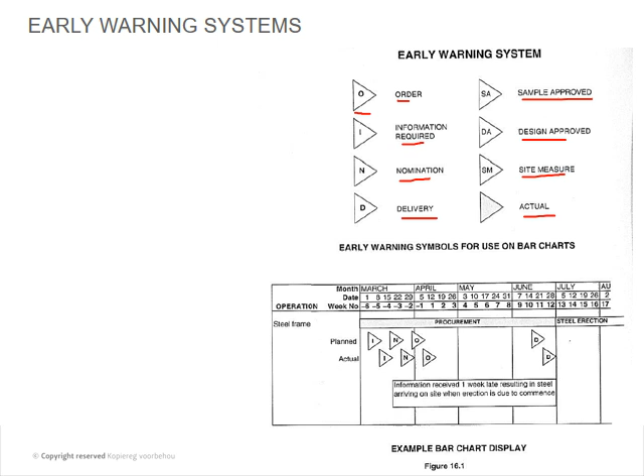So okay, then your progress and delays, progress reporting. Example of events: the contract is frequently delayed. So you can go read through 16.6 for me, which is all about progress and delays, and it's very important that you guys do read through this. And I'll probably in the near future have a bit of an informal assessment on this.

So please make sure that you guys know what a contractor risk event is. For instance, delay by the subcontractor, weather delays, labor, and employer risk events such as variations in designs, changes, late possession, and then other reasons. So you guys must be able to discuss 16.6 for me. Okay, then progress reporting.

The purpose of progress recording is to provide a record of weekly progress in order to assist the construction director, contracts manager, and the site agent, and to inform the monthly site progress meeting with the architect and his administrator, basically to keep track of what's going on. Then you have many procedures to assist you in this. In this chapter you can easily see they've got this little diagram that's included here.

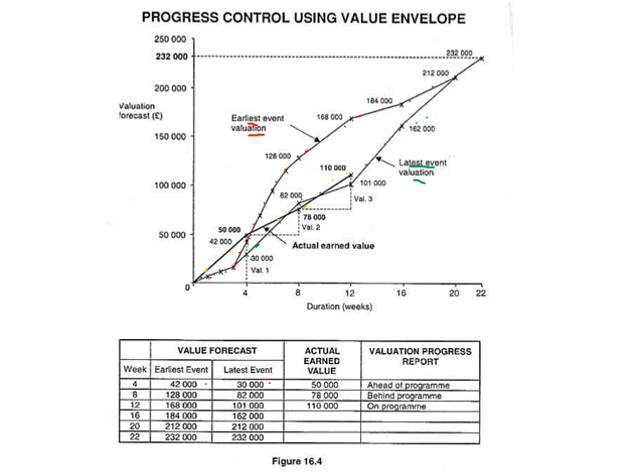Okay, and then obviously you get your actual, and I'm going to mark that in yellow, so this is your actual. Okay, so what they basically did is they had an optimistic view and a pessimistic view, and then you have your actual earned value. So please note that you have ahead of schedule. Just put it back on red. You've got your ahead of schedule, so it's on this side.

Behind on schedule, which is now where's your behind? Here's your behind, your 78. There's your behind. Okay, and then anything in between this area here is on program. Okay, so there's basically a bit of a float that you've got here. So you will see here is 110, and it means that you're on program. So you guys can see this.

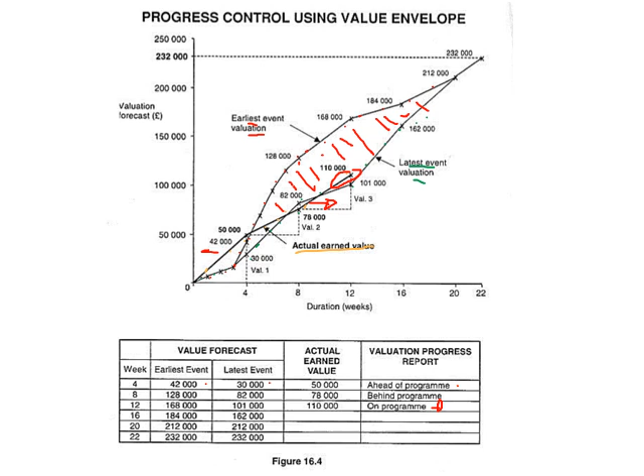This is a bit of a theory question that I might ask. So please go through this section. It's very straightforward. Just to remember that. Okay, then you need to go through delays. I'm not going to go through this.

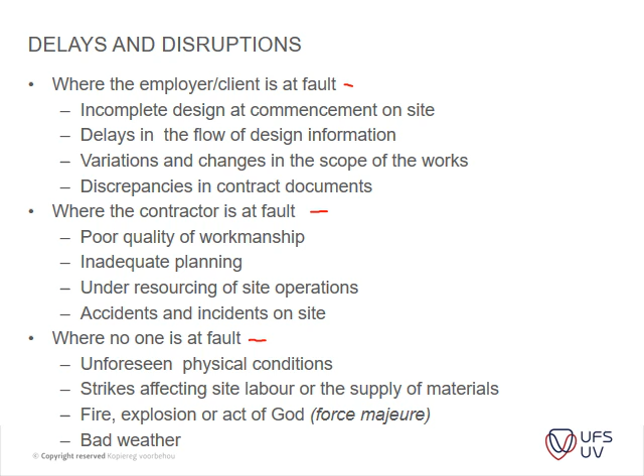This is very much theory that we've actually dealt with before, where the employer is at fault, where the contractor is at fault, where no one is at fault, force majeure as usual. So you guys have done this in CCM, so I'm not going to repeat this. But you will have to know or draw from this information when you do your discussions. So please don't neglect this.

Then we focus on your type of delays. You've got your delay event, which is if you go on page 360, you will see your delay event. It refers to something that happens or a set of circumstances that arise that lead to a delay. The delay event may be the responsibility of the employer or the contractor, or may be beyond the power of either party. Okay, so that's a delay event. It's an event that causes the delay.

Then you've got culpable delay, where the delay is the fault of the contractor. This is also referred to as a non-excusable delay or contractor delay, but we'll have a look at culpable later on. It just means someone is to blame for the delay. Then you've got a non-culpable delay, where the contractor is late through no fault of his own, which is your items, for instance, late issuing of information.

And then you've got your neutral delays, and neutral delays are divided into different sections. This is where the delay is caused by factors beyond the control of either of the contracting parties, but does not mean that neither party bears a risk. Okay. Neutral delays at the contractor's risk is bad weather, okay, late delivery, delay by subcontractors.

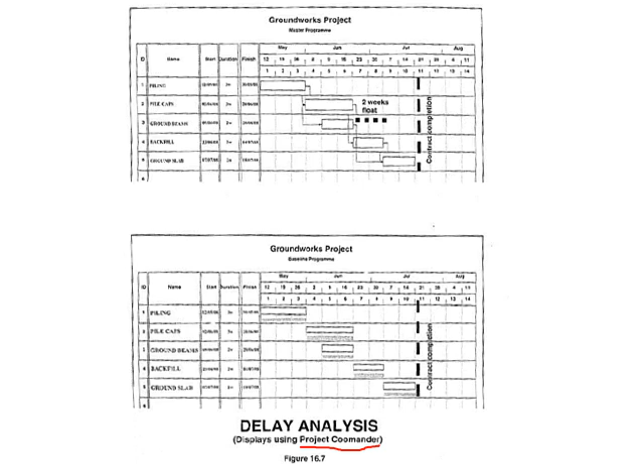So here you can see in 16.7, this is your planned program. So it's displayed using Project Commander. Okay, we usually have CCS or Microsoft Project. Commander I haven't worked on yet, but basically it just gives you a program with all the linkages in, and then it's the same program just given here underneath with your baseline underneath.

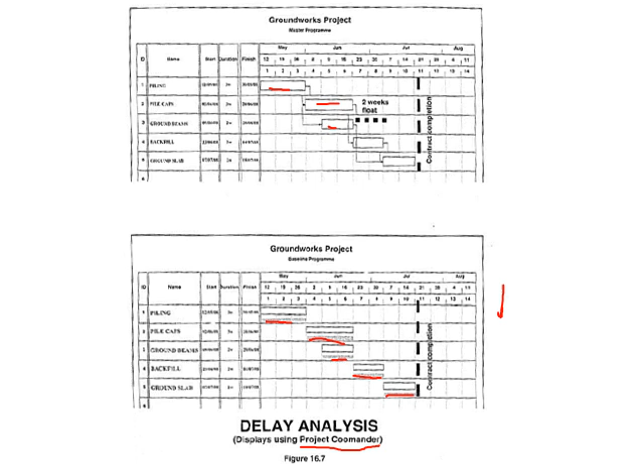In your Microsoft Project, that little line is the same. Microsoft Project just gives you the opportunity to keep the links in here and to show all the information like this. Okay, so this was before the project started. Now during the project there was the delay that we spoke of earlier. So you can see this is where the actual progress is. Okay, and this is where it was supposed to be. So this is at week 4, this was where the project was supposed to be.

So now what the program does is all they did was they moved the entire program out, and so that item is still not complete. That item still has quite a bit of work to do. This one had the float, the 2 weeks float that they spoke of. Okay, so that can start on that delay, and then you can see that this item's moved out.

Okay, so this is still on the baseline. This one moved out because that one is linked to that one, and that moves out, and that one is linked to that one. But you can see your baseline stays intact, and it shows this was your planned program which has been extended. Okay, fairly straightforward. So you must be able to indicate to me what a baseline program is. It's basically a baseline, a snapshot of what your original design was.

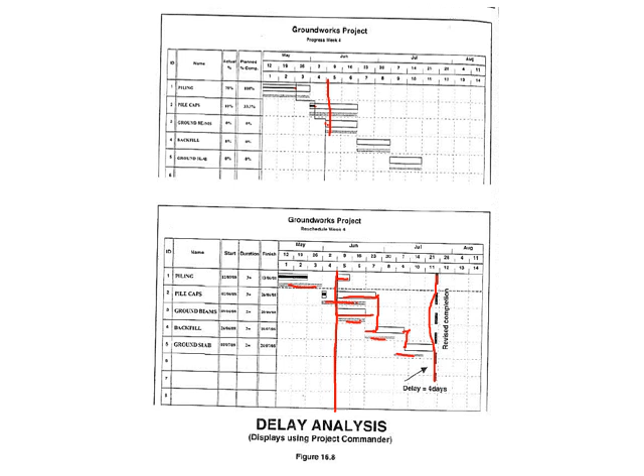Okay, then they continue with the discussions, and then the revised program at week 4 update. Your logical links are unhidden to show dependencies, including 2 employer risk events impacted after week 4. And the update: 10 days delay for the redesign of the rebar to the ground beams, and then a further 8 days delay for off-site fabrication of the new rebar.

The employer risk events are where the cause of the delay is the employer's responsibility under the contract, and delays, instructions, exceptional weather, unforeseen ground conditions, as in this case design variations to the ground beams. So basically what it says is

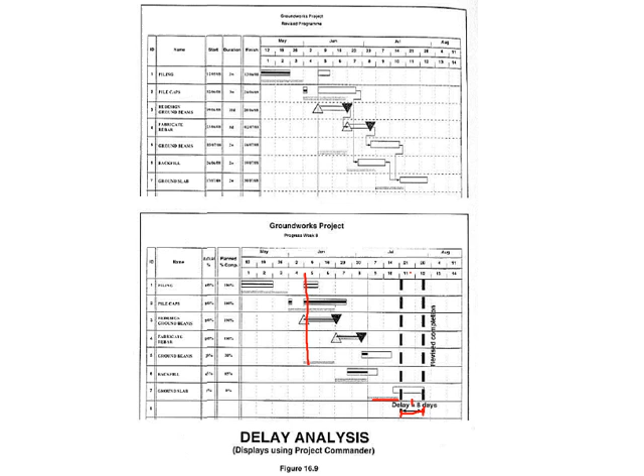Okay, thanks guys. And then on page 375, there's a few last items that I want to highlight for you. Please read through 16.16. Here they talk about when the project has been delayed for one reason or another. The contractor may wish to bring forward the completion date, or may be asked to do so by the client. If the contractor is not at fault in these circumstances, he should be paid for his trouble and effort through a separate agreement with the client.

Some standard conditions of contract, such as the ICE conditions, provide for this. There are several types of acceleration which have different legal meanings. Okay guys, so these items, pure acceleration, constructive acceleration, and expedited acceleration, are not too important. They're legal terms, but for our purposes we're not going to focus on that too much, because it is quite technical, and we don't usually work on the ICE contracts.

It basically just means what we discussed now: there are 3 delays. Either it is for the contractor's cost, no one's cost, or the employer's cost. So those are the main 3 focus areas that you need to know about your delays.